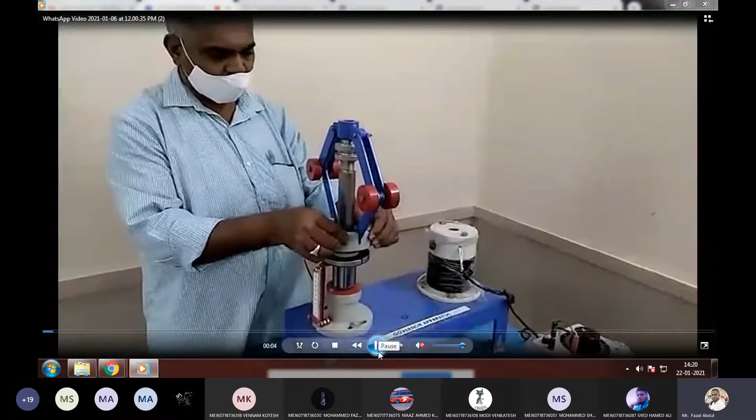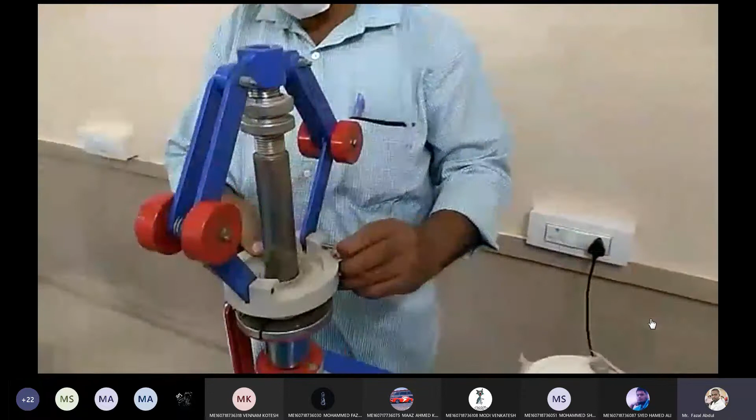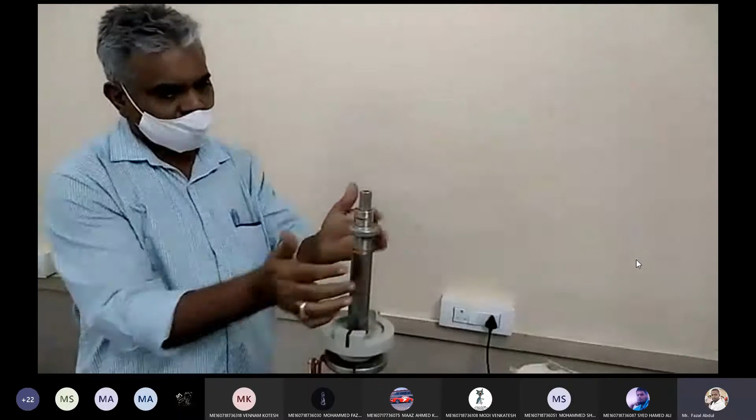See here, sir is adding the load, centrally he is adding the load here. So these points you have to remember.

Here for this apparatus, three sets of loads are given, the kg is not mentioned here. Now again the same Watt governor links are added here.

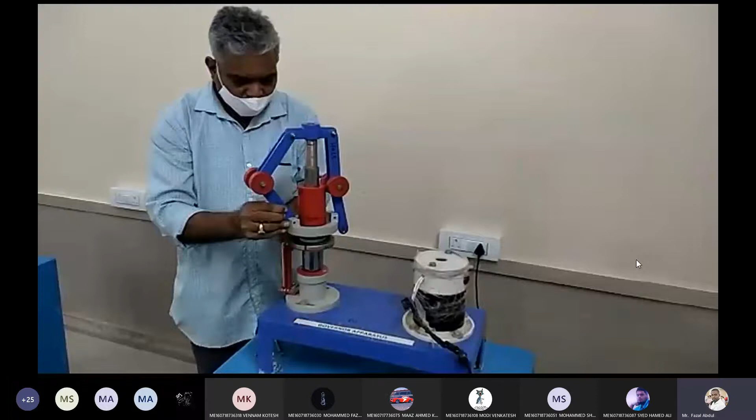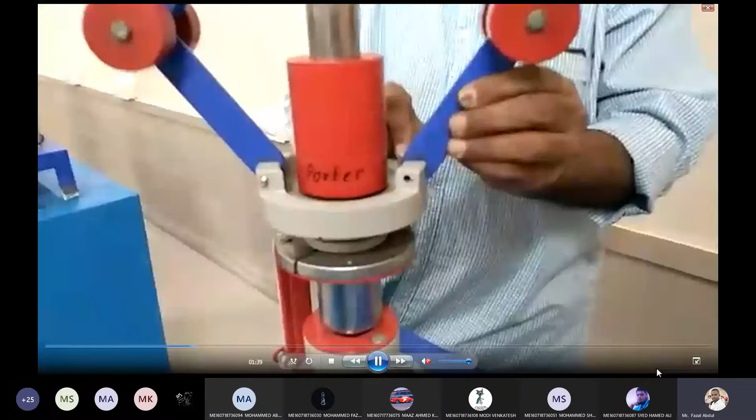Load centrally, it will become Porter governor. If we remove the load, that is Watt governor. If we add the load centrally on the sleeve, that is Porter governor.

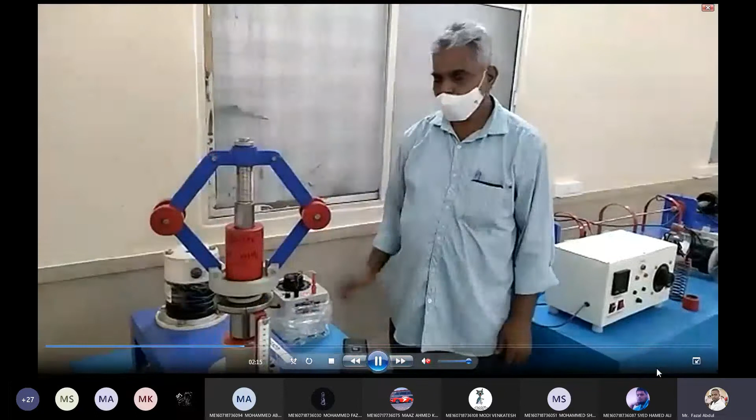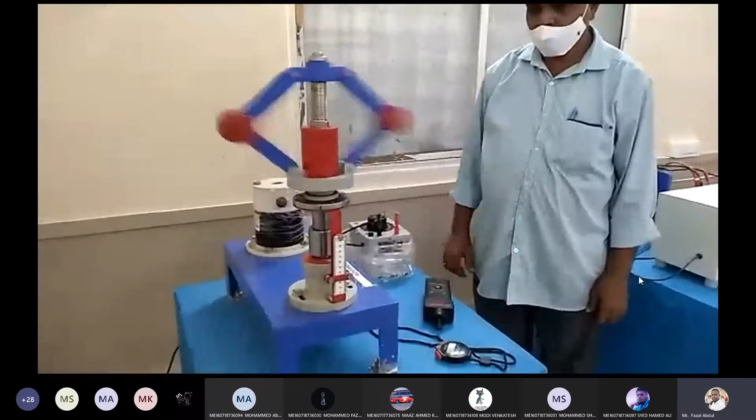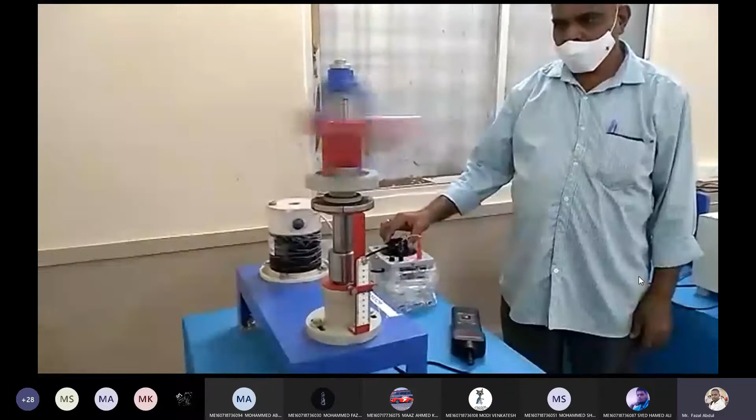This is a dimmer set used for increasing and decreasing the voltage. As current supply increases, speed also increases. As speed increases, the balls move outside because of the centrifugal effect. When the balls move outside, the sleeve lifts upward. Observe here, the sleeve is moving upward and downward as the speed increases and decreases.

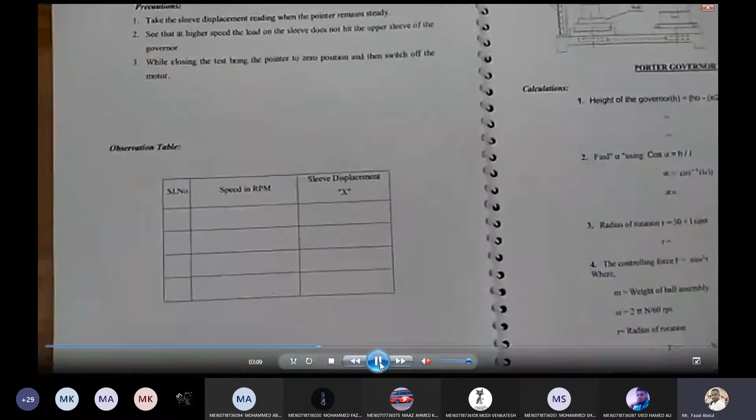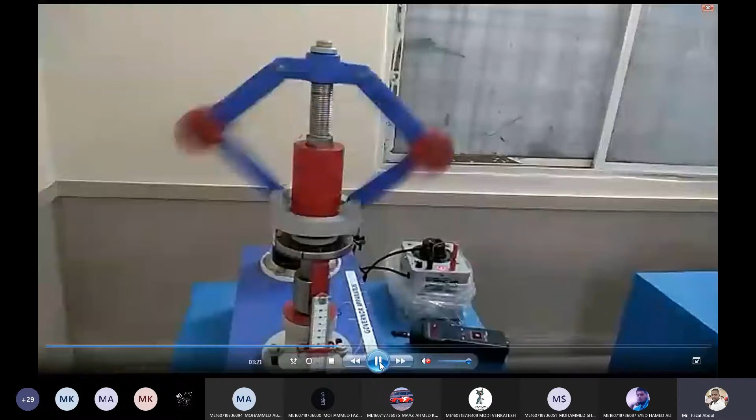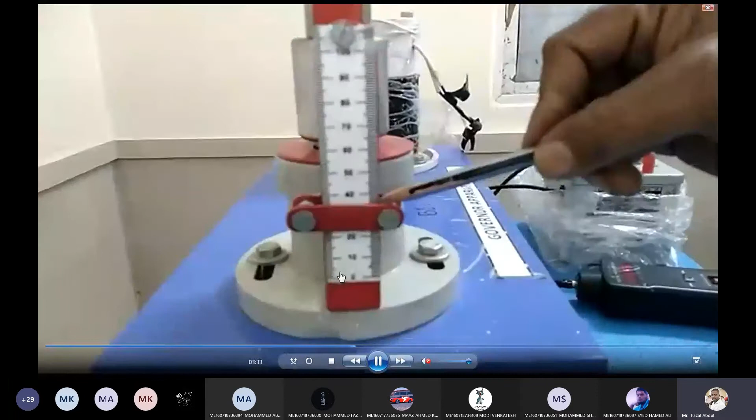Now take pen and paper and note down the readings. First note down the speed: 207 rpm. Now at this speed, how much is the sleeve displacement? The sleeve displacement is measured on the scale: 34 mm.

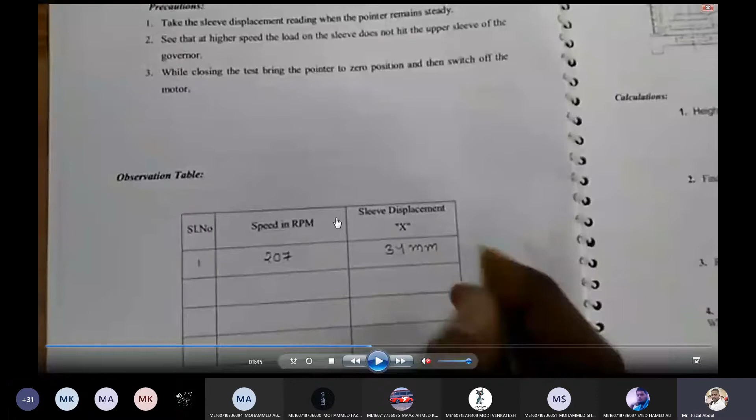On white paper, first make a rectangle box as the observation table. Then note down, for the first time, N1 has 207 rpm, sleeve displacement 34 mm.

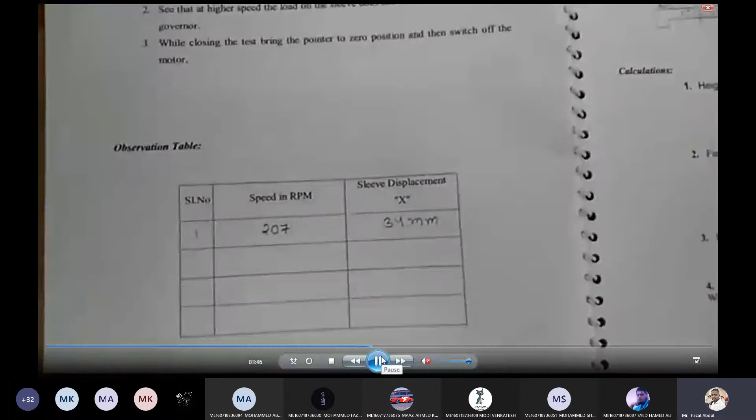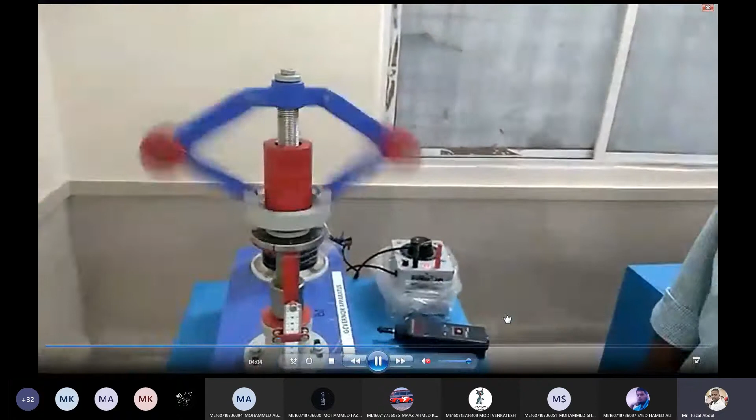Now for the second time, increase the speed slightly. Take the contact type of tachometer and take the readings of speed in RPM. Note down the RPM in the tabular column as N2.

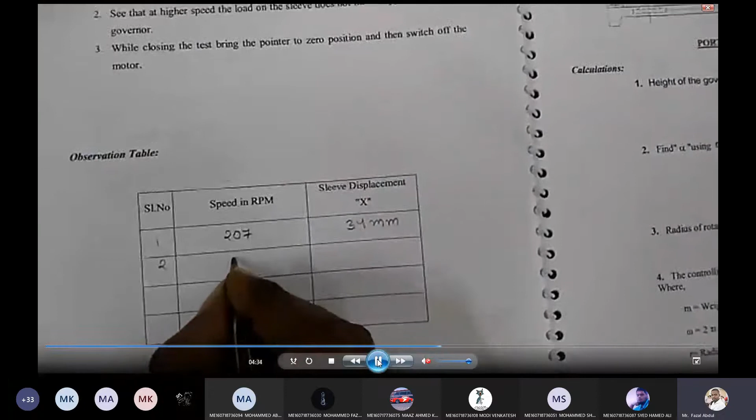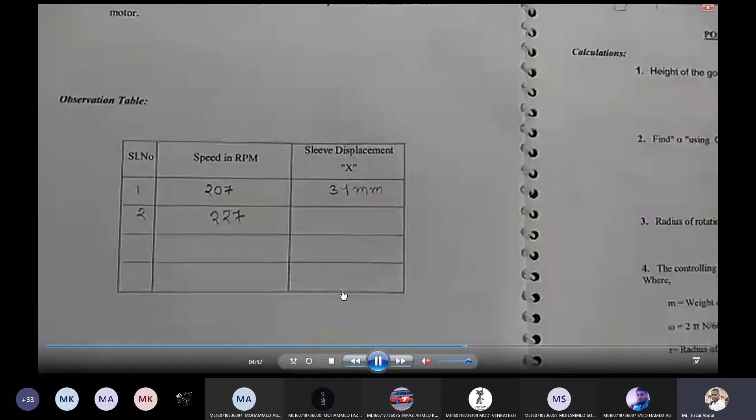Now what is the sleeve displacement at this time for the 227 RPM? That is measured on the scale. So note down the second readings.

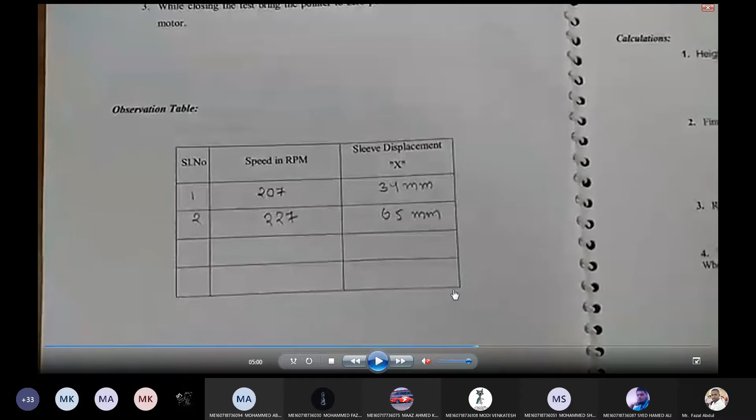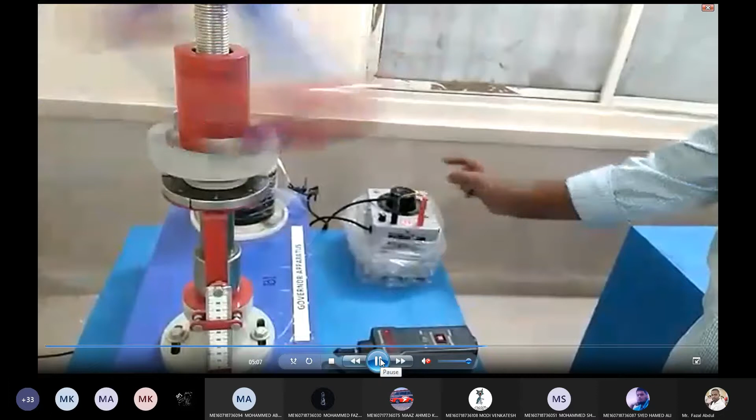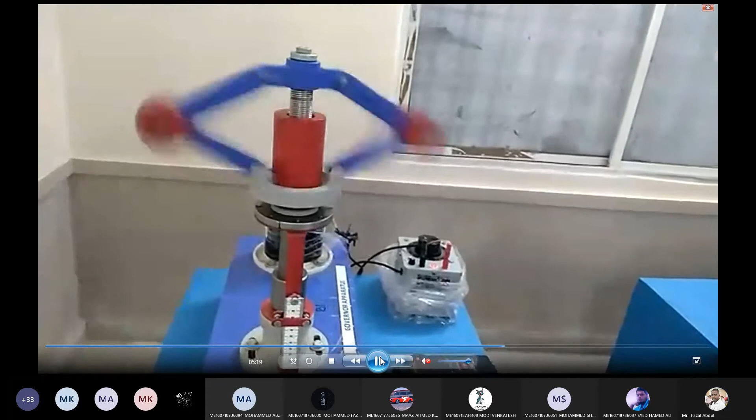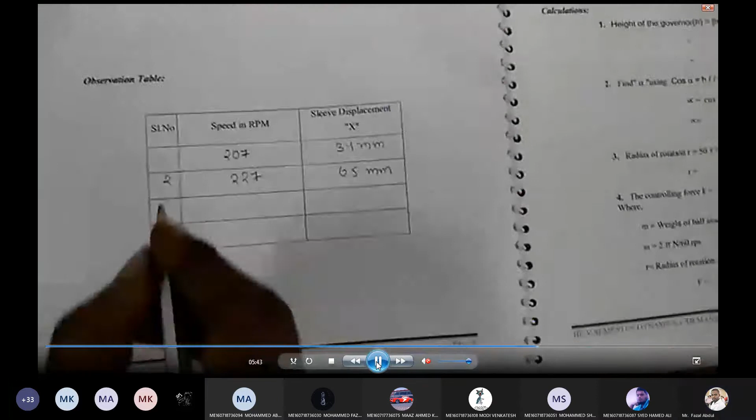Then for the third reading, increase the speed slightly again. Note down the third speed. For the third speed, the displacement is measured on the scale. Note down the third reading.

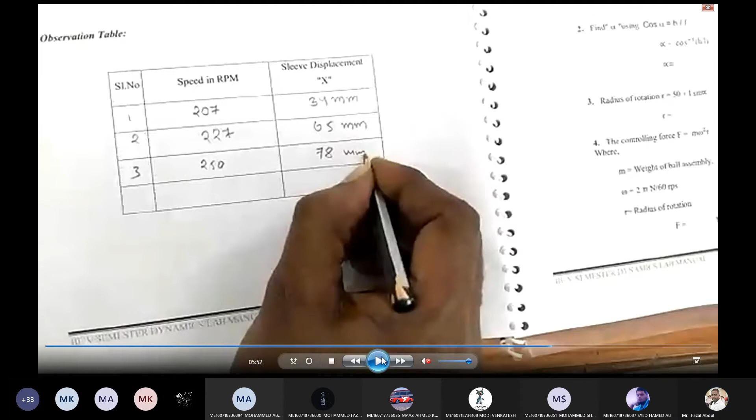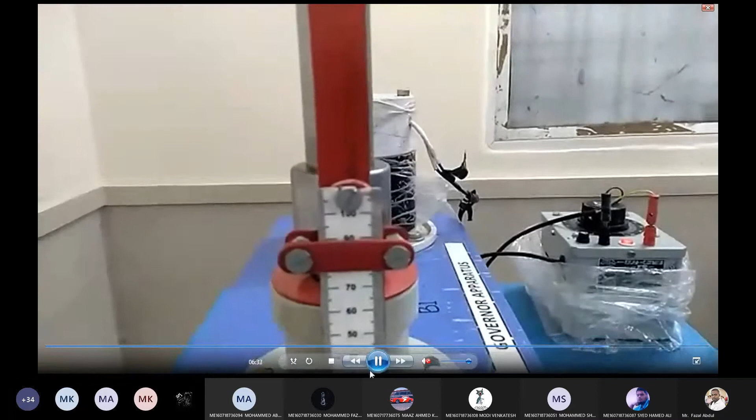Again increase the speed and take the reading on the scale for sleeve displacement. Note down on paper the speed and sleeve displacement. So total four readings are taken. Now do the calculation, draw the graph, take a photo and upload it in the chat box.

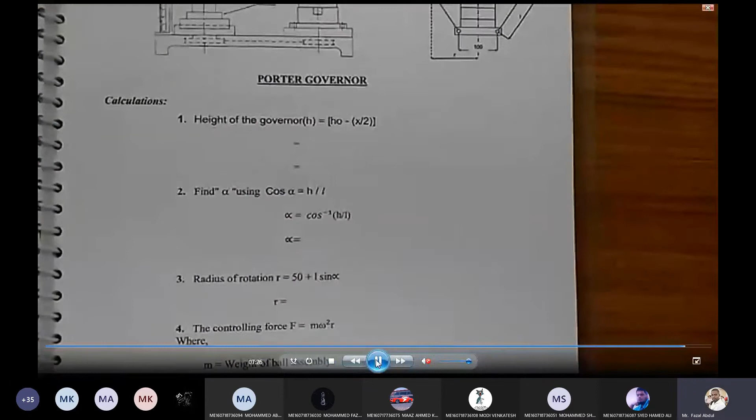So there are the calculations. I already uploaded the manual for today's experiment. You open that.